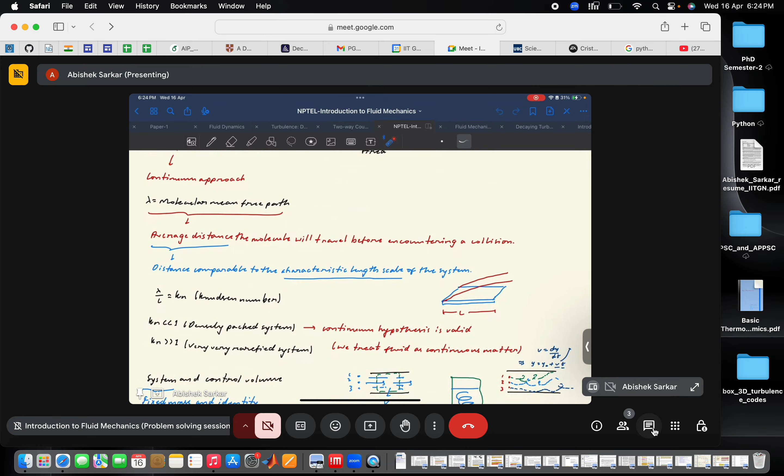But as we saw when dealing with the Navier-Stokes equation or the fluid kinematics part, these properties are operated upon by different differential operators. For these differential operators to operate upon these fluid properties, we need these functions or flow properties to remain continuous, and for that we took the aid of this continuum approach.

We stated that these flow properties, even if the fluid molecules are considered to be made up of, or if the bulk of fluid is considered as a collection of fluid molecules, then also at a certain length scale or limit we can consider the fluid properties to behave as a continuum.

For example, while measuring the density of the fluid, that is delta m by delta V, the mass as well as the volume of the fluid element is considered to be small enough. But how small? If the volume of the fluid element is very very small, we will encounter rapid fluctuations in its measurements. Also, if the elemental volume taken to measure density is considered too large, then we will not take into account the density gradients in the flow field.

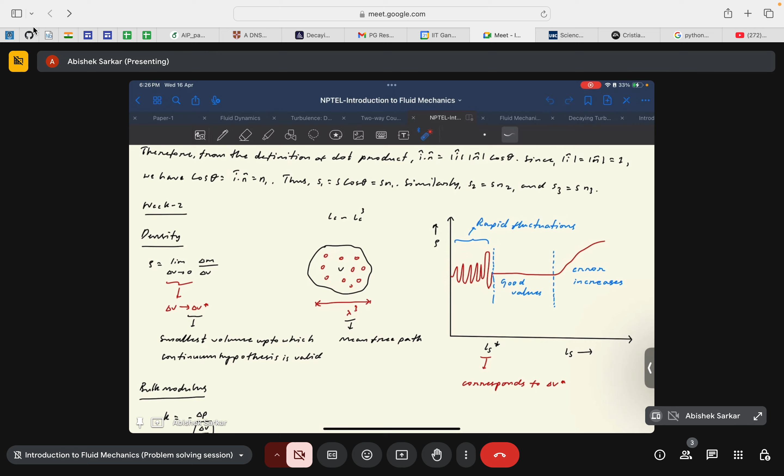Okay, so let me go back up. Sorry for scrolling to and fro.

This continuum approach that we discussed was quantified using a non-dimensional number, and by now you are quite well versed with non-dimensional numbers such as Reynolds number, and in this case, Knudsen number. There will be other non-dimensional numbers such as Stokes number or Froude number. These are the non-dimensional numbers we deal with while studying fluid mechanics, something you might have been introduced to in the last week of this course when discussing dimensional analysis.

Similar to it, Knudsen number is also one of those non-dimensional numbers used to quantify the continuum hypothesis. It is basically the ratio of the mean free path of the fluid molecule over the characteristic length scale of the flow. We discussed for ample amount of time what the characteristic length scale of the flow means.

If Knudsen number is much lesser than 1, it would mean that the fluid system is very densely packed and the continuum hypothesis is valid. But if the Knudsen number is much greater than 1, it would mean that the fluid system is very rarefied. Rarefied means the fluid molecules are much more far apart, which will result in the characteristic length scale of the flow field being of the order of the mean free path, or even greater, which will result in different kinds of errors in our measurements. That's why we tend to exclude this scenario while dealing with this basic fluid mechanics course, and we limit our study to the limit where the Knudsen number is much lesser than 1.

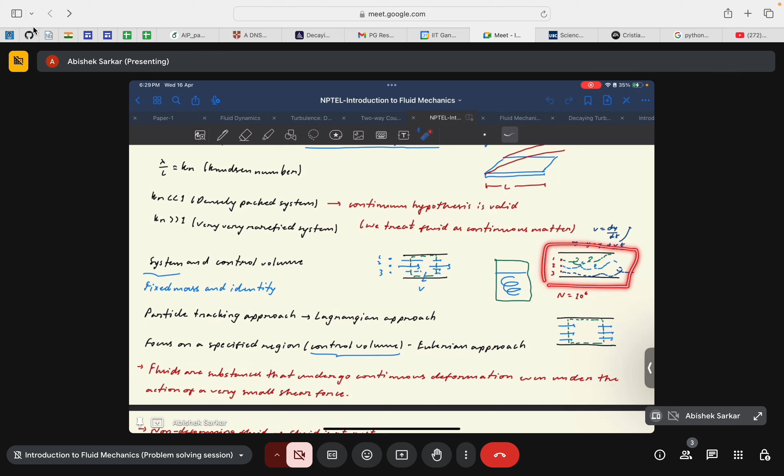But as we pointed out, say for example we are taking 3 particles here, a fluid mechanics system would comprise of n number of particles, where n will be very large, like around 1 million. So it turns out to be very impractical to check each and every particle every time to understand the behavior of this fluid mechanics system.

Rather than that, what we do is look into a particular region in the flow field known as a control volume, which we thoroughly discussed while covering the Reynolds transport theorem, using mass and momentum conservation respectively to understand the control volume approach. And we saw that this control volume approach gives us considerably accurate results with much lesser computational cost.

That's why the control volume approach was devised and is still very highly appreciated in basic fluid mechanics courses.

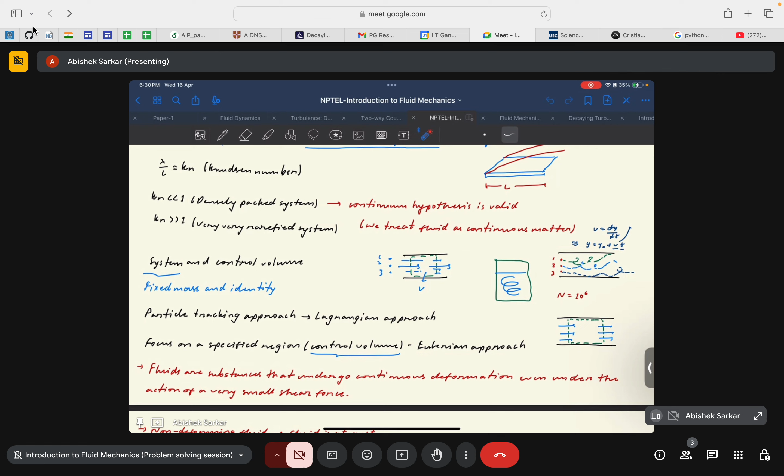Then we looked into the concept of traction vector, which was basically used to define the force acting on a particular area. You might ask, then why not define it as pressure? But pressure is not the only force that acts on a fluid mechanical system. We eventually saw that apart from pressure, there are shear stresses and normal stresses as well that act on the fluid mechanics system. So we need to take into account their contribution as well, which would lead to the deformation of the fluid element.

So in order to take into account all these kinds of forces along a particular coordinate direction, we define the concept of traction vector. This traction vector depends not only on the force and direction of the force, but also on the orientation of the area. That was one of the key features of traction vector, and we saw how it is related to the shear stress tensor.

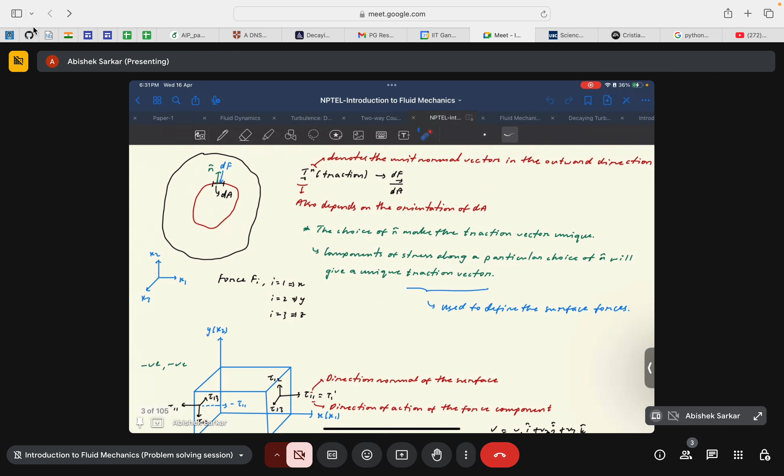By tensor we meant that it has two free indices, and we require two indices. For example, in the case of a second order tensor, we need two indices to completely define the property.

Shear stress, or stress in general, is a second order tensor where we need two independent indices, i and j, to define it completely. If i varies from 1 to 3 and j varies from 1 to 3, then tau ij is a second order tensor with 9 components. Since tau ij is symmetric, as we saw from the conservation of angular momentum, it has 6 independent components.

For example, components such as tau xy equal tau yx. Similarly, tau xz equals tau zx, and tau yz equals tau zy.

Then we used this particular approach to find the relationship between the shear stress tensor and the traction vector. We found that the traction vector can be related to the stress tensor by this relation, where repeating indices mean summation over that index, known as Einstein's index notation. So to point out the application of the traction vector in a simpler manner, let me show you a diagram.

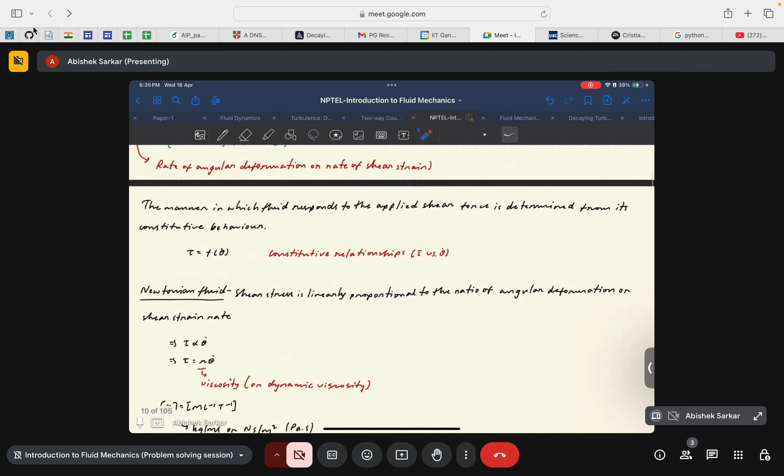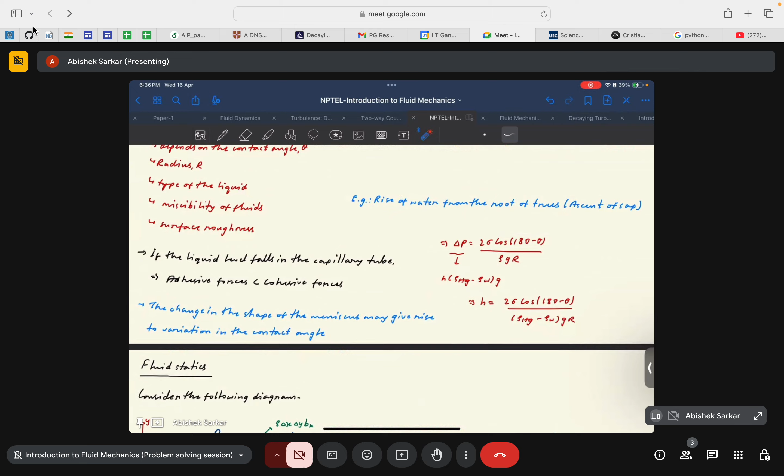Before that, I think we should discuss viscosity and surface tension as well, because I think I am skipping through this too fast. We should cover them as well.

Along with pressure, the other fluid properties are viscosity and surface tension. We found that viscosity originates from different sources in liquids and gases. In liquids, viscosity is due to intermolecular forces of attraction between fluid molecules, while in gases it is due to the molecular transfer of momentum.

In gases, if we increase the temperature, the movement of individual molecules is amplified, resulting in higher viscosity. That's why as temperature increases, the viscosity of a gas also increases. But in liquids, since intermolecular forces of attraction decrease with increasing temperature as the fluid molecules tend to move apart, the viscosity of these liquids in bulk will decrease as temperature increases.

Then we found out that these fluids can be classified into two major categories considering viscosity: Newtonian fluids and non-Newtonian fluids, where Newtonian fluids are a type of fluid where the shear stress in the fluid elements is directly proportional to the shear strain rate.

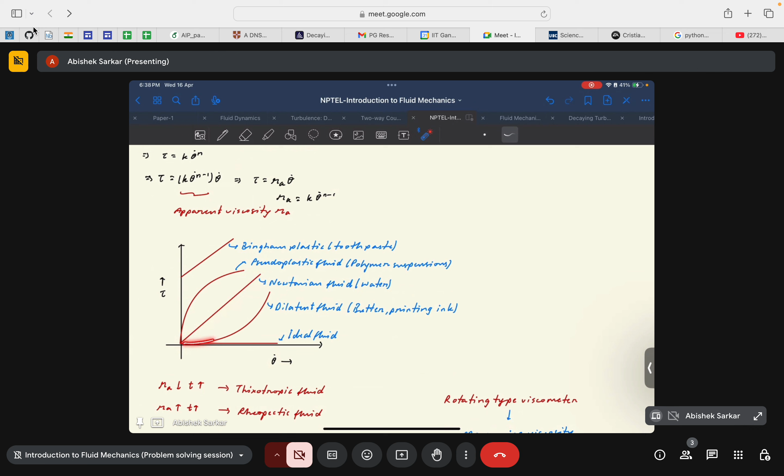So this was the graph used to describe these different kinds of fluids. For ideal fluid, since there is no viscosity, the shear stress is 0, so there is no shear strain generated, that's why the shear stress will also be 0. So Newtonian fluids, since they are directly proportional to each other, give a linear line, and other types of fluids show different kinds of behavior accordingly.

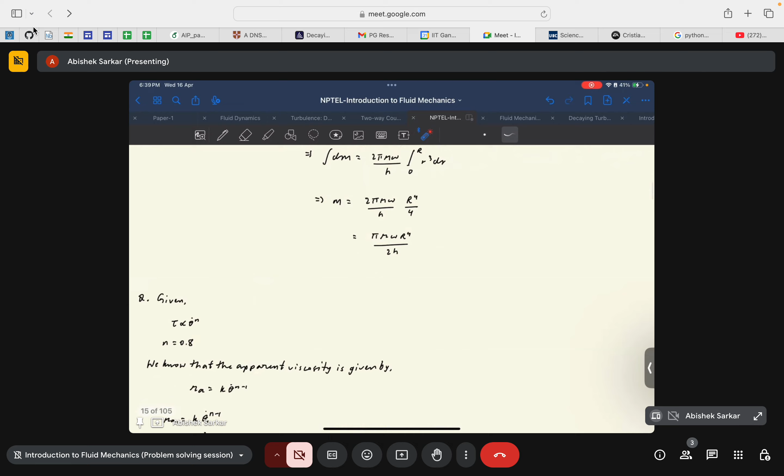Then we discussed the concept of surface tension, which is basically the additional force in the fluid molecules that they have, the additional forces that these fluid molecules have in order to retain their shape, even if there is a discrepancy of forces in the fluid molecules at the surface of the liquid.

For example, if this is the free surface and this is the liquid molecule, then because of the cohesion forces between the lower surface of this liquid molecule and the liquid in the bulk liquid, the attractive forces between these fluid molecules and the bulk liquid molecule will be higher than the attractive forces between the upper surface of the liquid molecule and the vapor above the free surface.

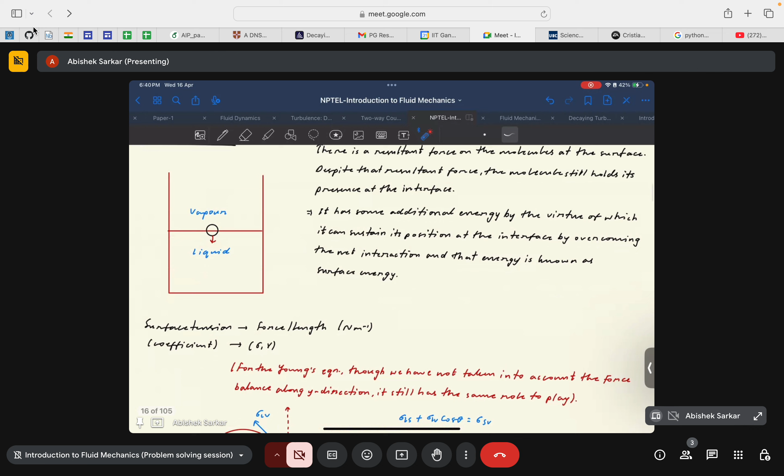But then also because of this imbalance of forces, the liquid molecule will try to get dissociated, it will try to break apart, but then also the liquid molecules tend to retain their shape, and this additional force, by the virtue of which they are able to retain their shape at the free surface, is known as surface tension. This surface tension force per unit length is defined as the surface tension coefficient, known as sigma.

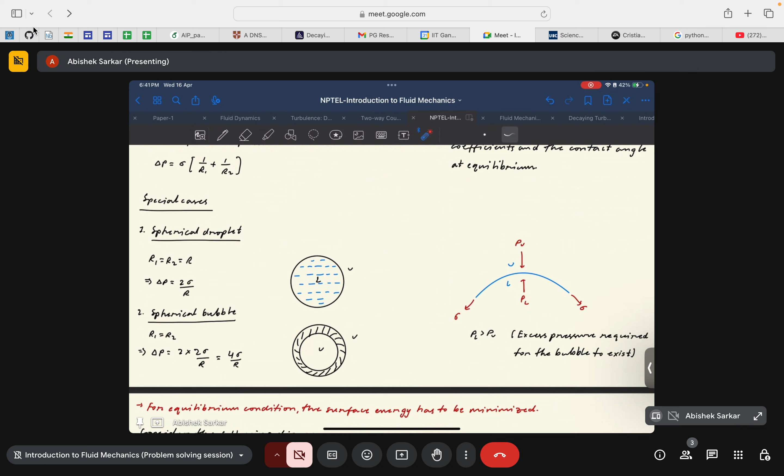So these are related, and this surface tension coefficient for different cases is given. For example, in the case of spherical droplets, the excess pressure inside the spherical droplet is given by 2 sigma by r, where r is the radius of the sphere. In the case of a spherical bubble, it will have two different liquid layers, so you need to take into account the contribution from these two layers separately, which gives delta P as 2 times 2 sigma by r, that is 4 sigma by r.

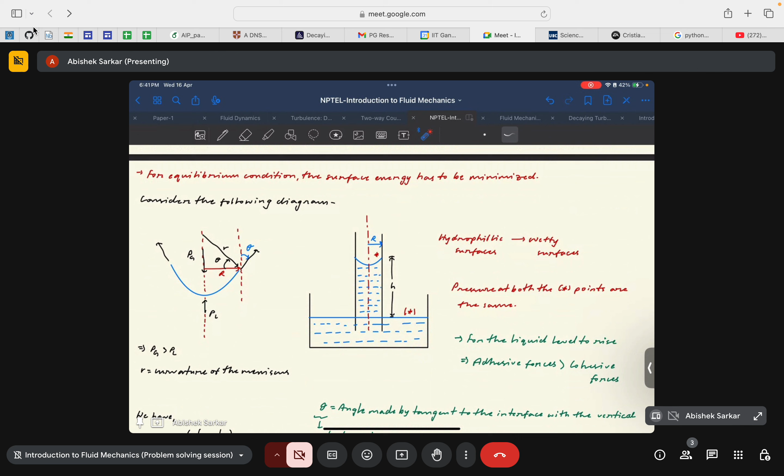Then there was the concept of capillary rise, which is basically the balance of the surface tension forces that tend to hold this liquid column, and the weight of this liquid column then tends to pull this liquid column down. Capillary rise usually occurs when a very thin capillary tube is placed inside a liquid container, and because of the adhesive forces between the surface of this tube and the liquid molecules, the liquid tends to get pulled up.

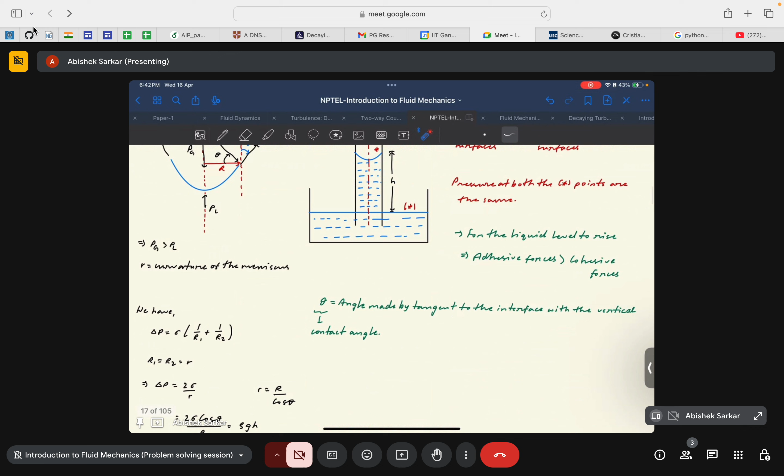We do a balance between the surface tension forces and the weight of this liquid column to find the expression for capillary rise, and we found that for an acute angle of contact we get delta P as 2 sigma cos theta by r, or the capillary rise as 2 sigma cos theta by rho g r.

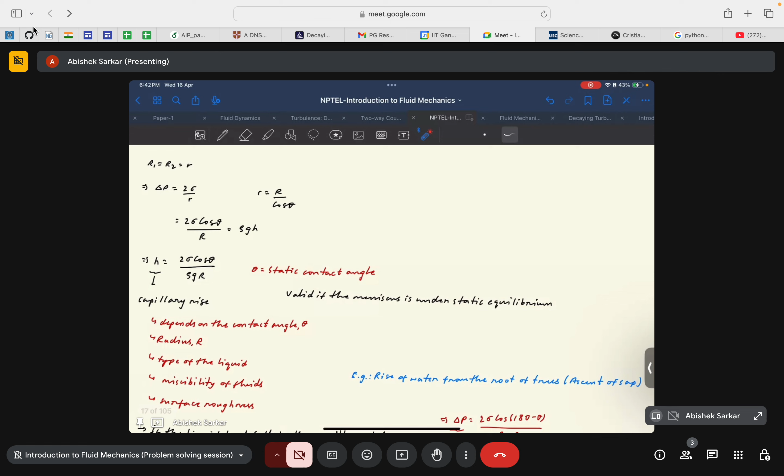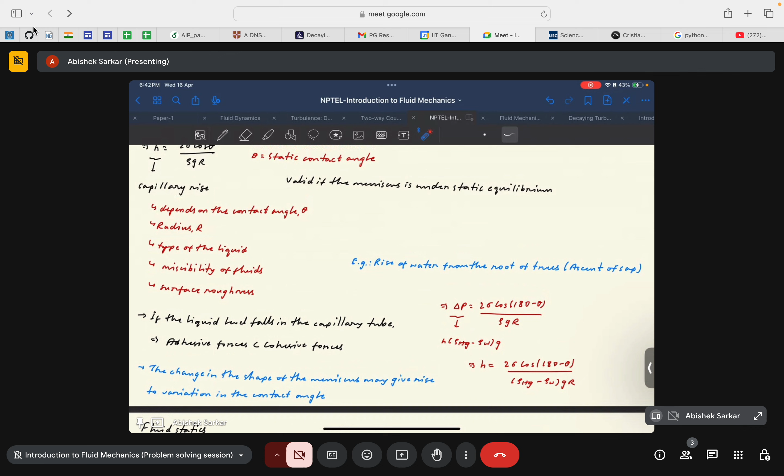Similarly, we found that in the case where the static contact angle is greater than 90 degrees, the obtuse angle, then delta P is given by 2 sigma cos(180 minus theta) by rho g r. This is usually found in fluids such as mercury, so rather than the liquid level going up in the capillary tube, the liquid level tends to go down, it tends to dip.

The meniscus, that is the shape of the free surface formed in the capillary tube, in the case of an acute angle, is a concave surface, but in the case of obtuse contact angles, for example in the case of mercury, they tend to form a convex meniscus.

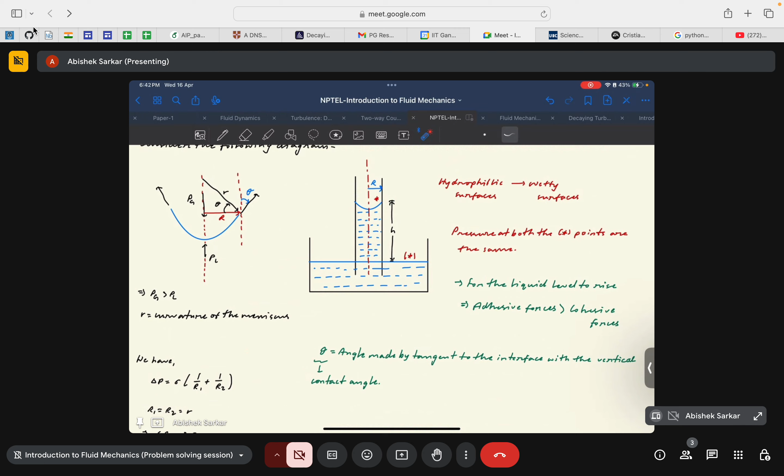Then we discussed the fluid statics part, where we see the variation of pressure. So let me reiterate: the entire subject of fluid mechanics can be divided into three fundamental parts: fluids, fluid statics, which we'll discuss first in today's discussion, and then after that we will look upon fluid kinematics.

And then fluid dynamics. Okay, so because of this constraint of time, I don't think I will be able to reach up to fluid dynamics, but since we already discussed this in the last few weeks, it should be quite fresh to you. The basic thing is that fluid statics, as the name suggests, refers to the concepts of fluid mechanics where the fluid is at stationary state, and we look upon the entire dynamics of the fluid flow, where we consider the forces as well as the motion generated.

We look upon the forces that act on the fluid when it is at stationary state. In the case of fluid kinematics, as the name suggests, the fluid is in motion, but rather than looking upon the forces that generate the flow, we are more interested in visualizing how the flow behaves given that the flow is in motion. So we do not look upon the origin of the forces that drive the flow. But the theory would seem incomplete if we do not look upon the forces that generate the motion of the fluid. That's why in fluid dynamics we look upon the complete analysis of fluids in motion, where we consider both the motion and the forces that generate it.

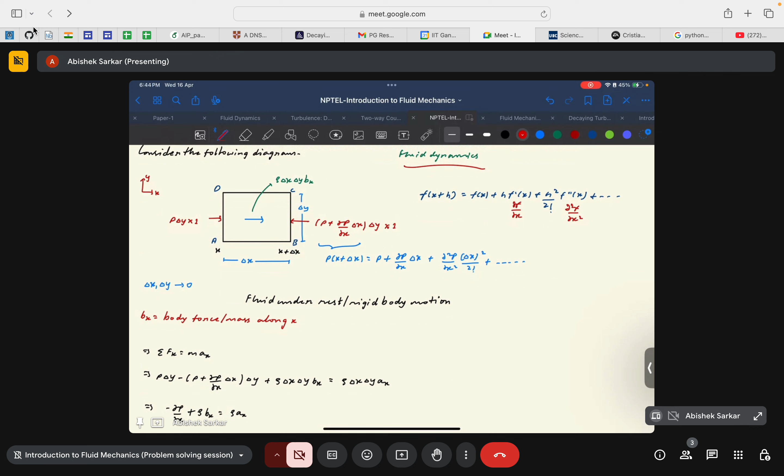We start with the basic governing equation given by Euler's equation of motion, again, because since the fluid is at static state, even if the fluid is very highly viscous, it won't generate any kind of shear forces because the velocities become zero. As you saw, these shear stresses are basically a function of the velocity gradient. So if the velocity itself is zero, there is no velocity gradient. That's why there is no need of considering these viscous forces.

So the basic governing equation of motion in the case of fluid statics can be derived from this Euler's equation of motion, given by this equation. Once you do that, finding out the governing equation of fluid motion along the x, y, and z directions, we find that along the z direction the pressure gradient is balanced by the body force due to gravity, and we found that this relation, dp by dz equals minus rho g, turns out to be one of the very important relations.

This is an important relation in fluid statics, which becomes the base of different kinds of flow measuring devices, such as pressure measuring devices like the manometer. In fact, we use the same concept in the venturimeter as well, where we use similar manometers or piezometers to measure the pressure gradients. So this dP by dz equals minus rho g is known as the hydrostatic law, and is indeed one of the very important equations in fluid statics and in fluid mechanics in general.

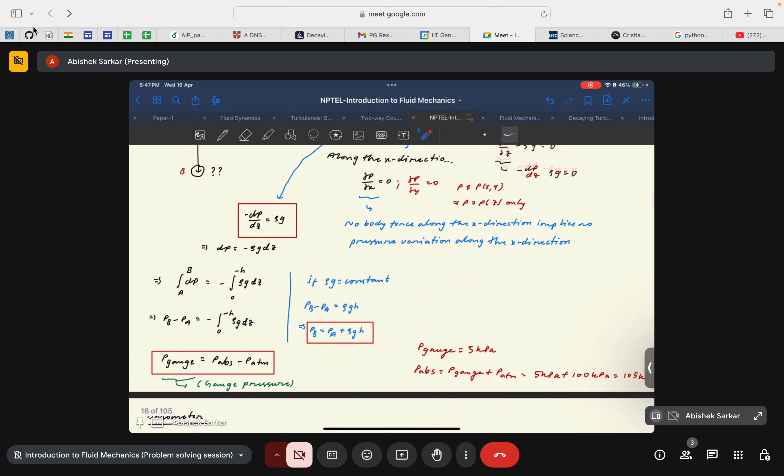Given this equation, we find that pressure is not constant throughout the depth of the fluid, but is rather a function of the depth, where pressure increases as the depth of the fluid increases. For example, if we're measuring pressure at point A and at point B, then pressure at point B would be higher because pressure is a function of depth. We will see what implication this has while we measure the forces on submerged bodies.

So then we look upon the principle of manometry. This again is one of the very important concepts, and we can expect questions in the exams on manometers. Let me just go through this example once again. It's basically a flow occurring from A to B, and here we can try to correlate all the concepts that we have discussed till now. If you would have attended the lecture by Professor Chakraborty or the problem solving sessions, you would understand that, for example, in the case of flow through this pipe or duct, whatever it may be, let us consider it's a flow through a pipe.

For a flow to occur, we need a negative pressure gradient, right? That we found out as one of the fundamental conclusions from the exact solutions of Navier-Stokes equation. We found out that dP by dx, or any axial direction, no problem. But for example, if I consider the coordinate systems as x and y, then this dP by dx has to be negative for the flow to occur in the positive x direction.

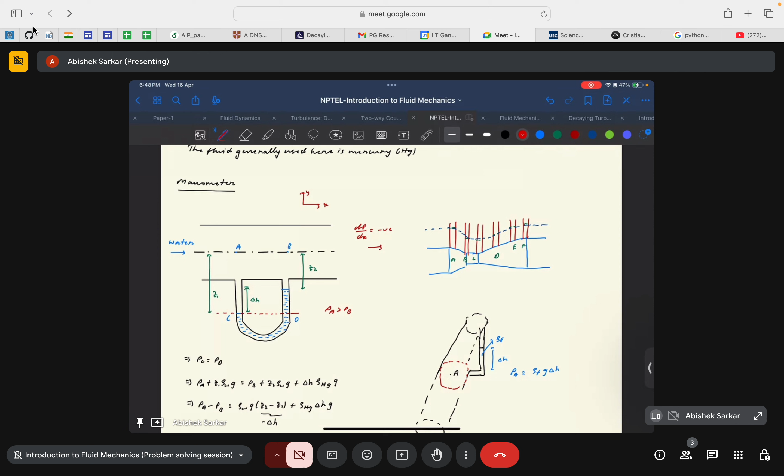By now you would have understood that since the flow is occurring as shown by this arrow, for the flow to occur from A to B, pressure at point B has to be lower than pressure at point A. So since the pressure at point B is lesser than pressure at point A, it will displace a lower volume of liquid in the manometers compared to point A. So just by looking into this diagram, you should understand that the pressure at point B is lesser than pressure at point A.

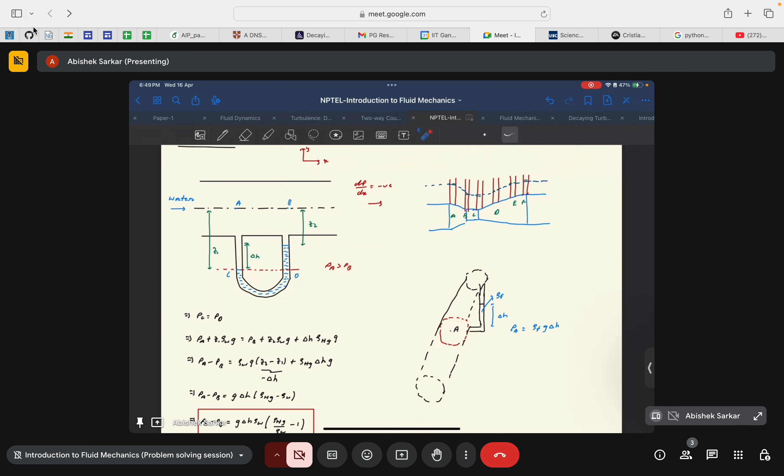Now secondly, in order to find a relationship between the pressure difference between point A and point B, we use the principle of manometry. So in order to do that, we consider a datum which would ideally be the lower level of the liquid column in the manometer. For example, it is at point C, the liquid level is at lower position. So when we consider the datum to be at point C, then the different heights or distances of these different points need to be found out.

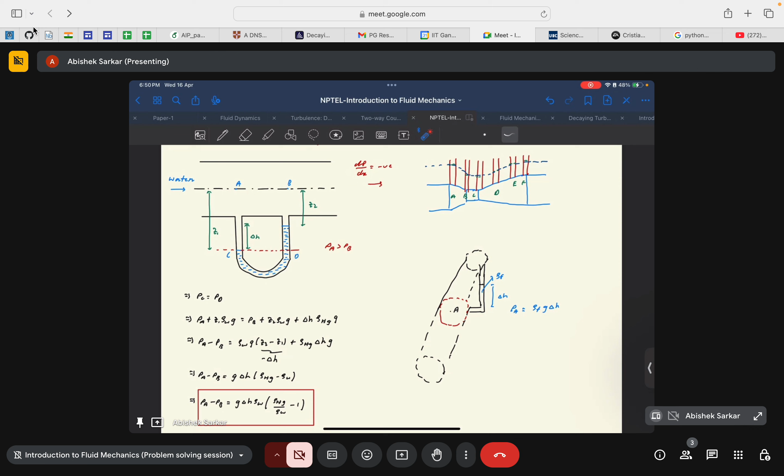So what we do is, we know that from hydrostatic law, pressure at the same depth would be equal. Since point C and point D are at the same depth, pressure at point C and point D has to be equal. So we equate the pressure at point C and point D, and any discrepancy in pressure is taken into account because of this difference of fluids. We'll see how. PC is equal to PD. PC, pressure at C, would basically be pressure at A plus the pressure because of this particular liquid column. That is, if the density of the fluid, water in this case, is rho W, then the pressure because of this length of liquid column would be rho W G Z1. So that's what we have written here.

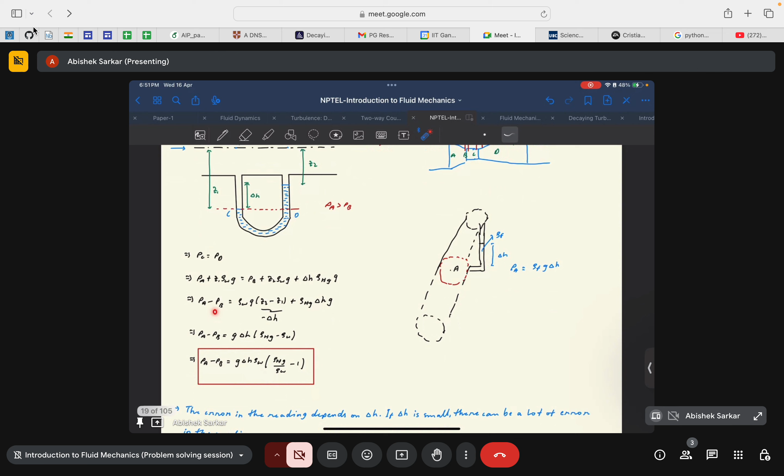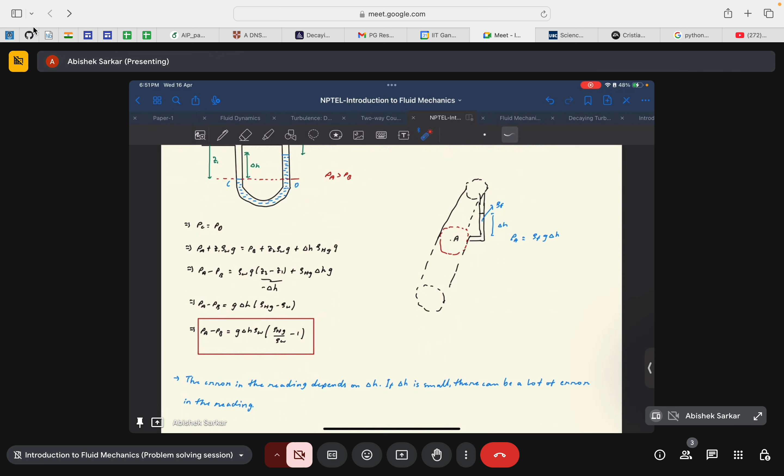And then pressure at point D would be PB plus rho W G Z2 plus rho Hg, that is the manometric fluid used in this particular case, into delta H times G. So that's exactly what we have done here. Then just take B to the left hand side and this term to the right hand side. From that, after doing some calculation, we find out that PA minus PB is equal to G times delta H times rho Hg minus rho W. So this is very simple. Any kind of manometer question that you can get in the exam should not be that difficult, and moreover much more difficult questions will not be asked. So it will be very simple, but you need to know the very fundamental principle upon which these formulas are derived.

Then we look upon the forces on plane surfaces. That is, if we submerge a particular surface in a liquid vessel, what are the forces that act on those particular objects? These kind of scenarios become quite relevant when we are designing dams or structures that are made on water bodies.

In order to do that, we take the help of this equation given by yp is equal to yc plus ic by a yc, where yc is the center of gravity, the location of the center of gravity from the free surface, as I can show here. So h bar basically would be yc, the distance of the center of gravity of this particular shape from the free surface, and yp is the center of pressure, or distance of center of pressure from the free surface.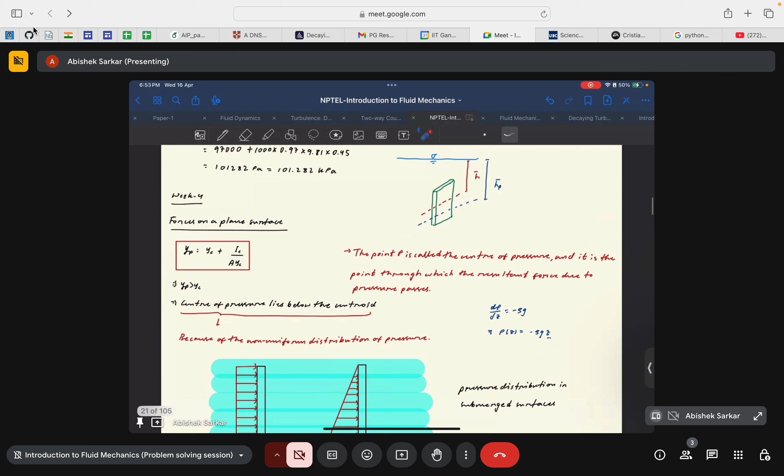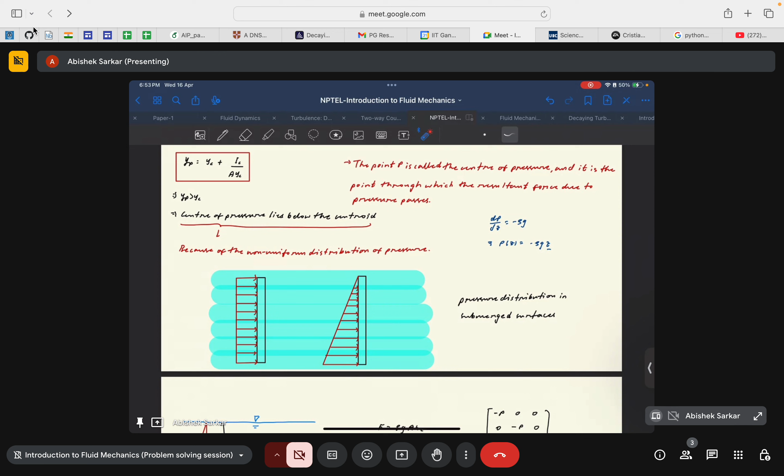This discrepancy between the center of pressure and the center of gravity primarily arises because the pressure distribution is not uniform in the case of hydrostatic condition. This pressure increases with depth, as shown in this pressure distribution. So if you are going to find the center of gravity because of this pressure distribution, you find, I will not say center of gravity, but the center of balance, or I don't know what term to use.

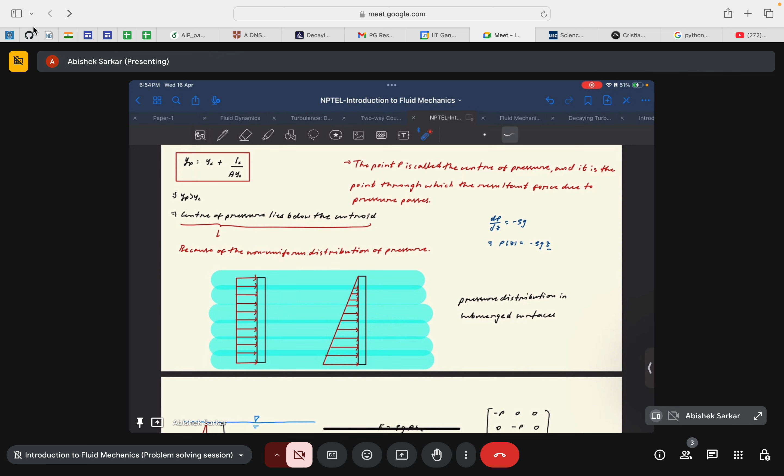For example, if you are trying to find out what should be the center of gravity because of this type of loading, you will find out that it will not be at the center, but rather it will tend to be tilted towards the lower half, just to take into account the higher pressure forces at the lower end of the surface of this particular shape. That's why this center of pressure is always at a greater depth than the center of gravity of the body in the case of fluid statics.

Then we solve different examples, and just for the sake of your exams, what you can do is look into these examples that I have taken in class, also examples by other TAs as well. So it is a good exercise.

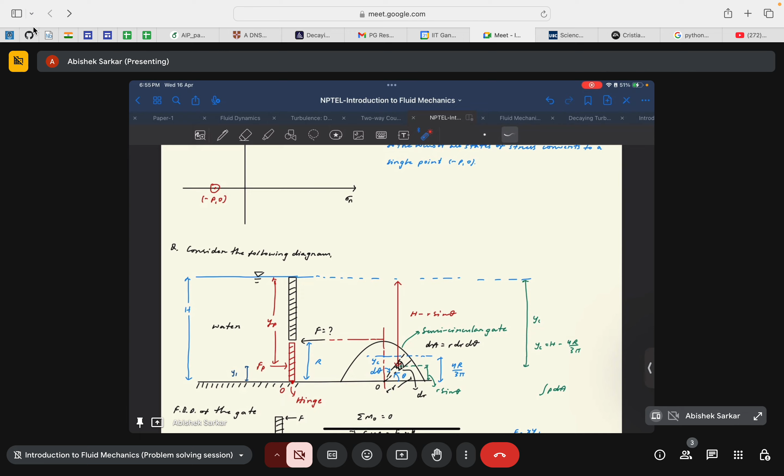The crucial thing to remember is that in these kinds of questions, remembering the formula for the moment of inertia is quite helpful, as well as the center of gravity, because it will not always be the case that you get the shape to be a simple rectangle or square. Rather you can get something like a semicircle or a triangle as well. So you need to remember the formula for the area moment of inertia and the center of gravity of that particular shape. That might come quite handy.

Then there was the concept of stability of submerged bodies and floating bodies. We found out that in the case of submerged bodies, the stability criteria was determined by the position of the center of buoyancy and the center of gravity. If the center of buoyancy was above the center of gravity, then the body was at stable equilibrium. By stable equilibrium, I mean that if you give a certain tilt or displacement to this particular body, because of the location of the center of buoyancy and the center of gravity, it will tend to generate a restoring moment that will revert the orientation of the body to its initial position.

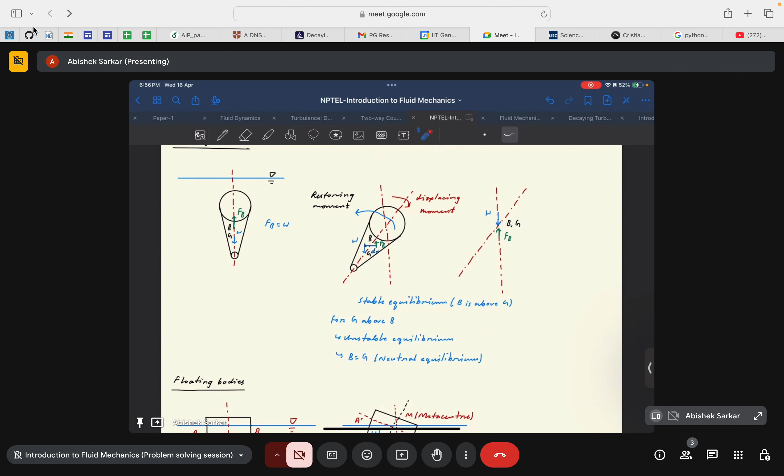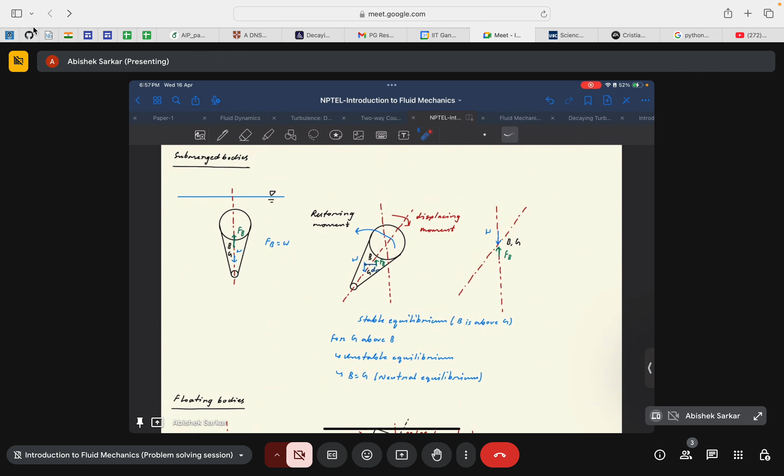In the case of unstable equilibrium, if you give a certain displacing moment, then because of the location of the center of gravity and the center of buoyancy, it will tend to displace the body even further, resulting in an unstable scenario. So for fully submerged bodies, if the center of gravity is above the center of buoyancy, the body is at unstable equilibrium, and if B and G coincide, then it is at neutral equilibrium. Whatever displacement you give, the body will tend to remain at that particular alignment.

But in the case of floating bodies, which is a topic of more interest from the perspective of fluid mechanics, the stability of these floating bodies is determined by the location of the center of gravity and the metacenter. We found out that the location of the center of buoyancy is not fixed in the case of floating bodies, because the area of the body that is under the fluid changes when the orientation of the body changes.

Since the area or orientation of the submerged part of the body changes, the location of the center of buoyancy also changes. The line drawn from the center of buoyancy to the axis of the body, where these two lines meet, is known as the metacenter.

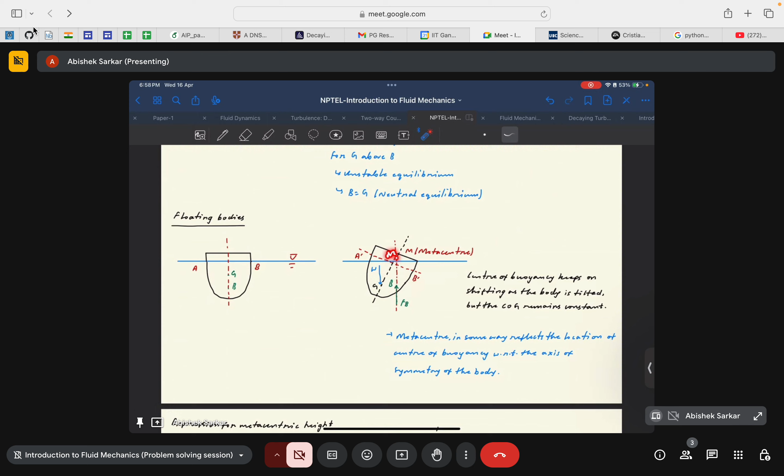We found that the stability criteria is: if the metacenter is above the center of gravity of the body, we get stable equilibrium. If the metacenter is lower than the center of gravity, the body is unstable. If the metacenter coincides with G, it is a neutral equilibrium.

There was one more interesting scenario discussed by Professor Chakraborty. He pointed out that if M above G is the stability criteria, then it's intuitive that if we make the body wider, pushing toward a wider shaped body, the metacenter would be at a higher location, creating a more stable scenario.

But he also pointed out that if the metacentric distance, from the center of gravity to the metacenter, is very large, it creates different issues. He took the example of a ship: if the metacentric height is too much, any displacement of the ship creates discomfort for passengers. So it's usually a compromise between passenger comfort and vessel stability that determines the metacentric height.

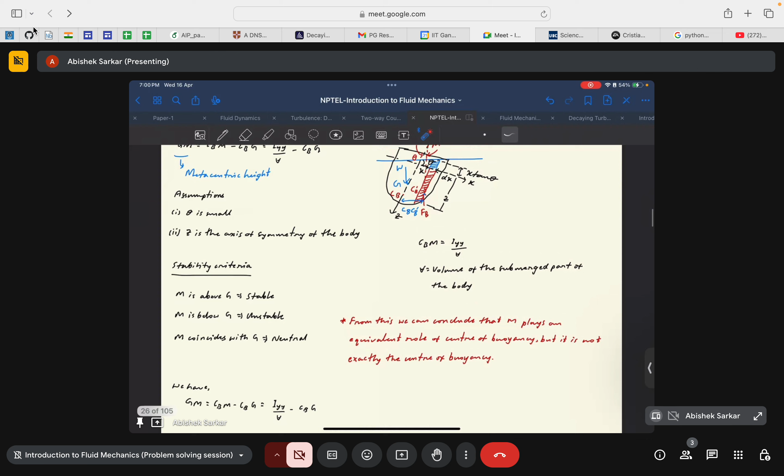Then we look into the formula for finding the metacentric height, where IYY denotes the moment of inertia of this particular shape, and V denotes the volume of the submerged part of the body.

Then we look into the concept of fluid under rigid body motion, where the governing equation for this scenario was found from the fact that the change in pressure at the free surface is equal to zero.

Then, using the concepts of complete differential and Euler's equation of motion, we found that the slope of this free surface can be found to be tan theta equals ax by g. This is the slope of the free surface.

Going back here, if the height of the slanted surface becomes higher than the height of the vessel, the liquid will tend to spill out of the container. This height of the slanted surface in the liquid container was determined by the acceleration of the vessel.

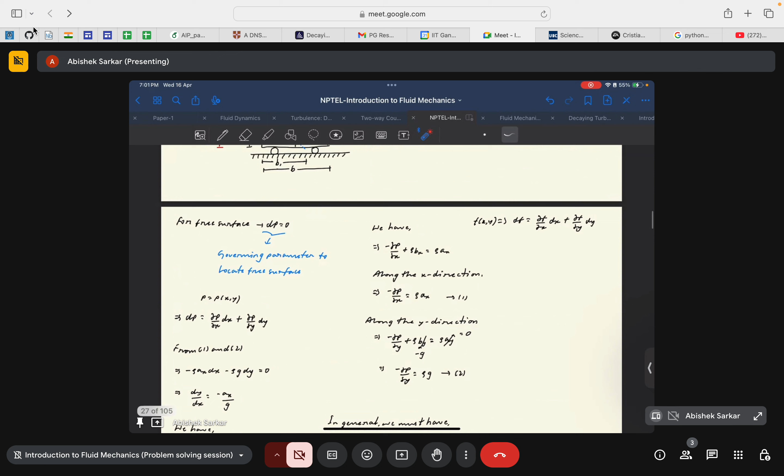So there might be questions asking what is the value of this acceleration that the body can reach before the liquid starts to spill out from the container.

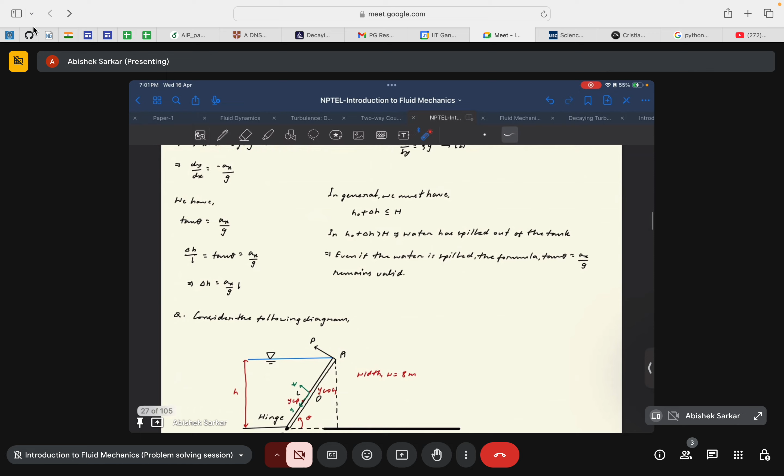Then we start our discussion with fluid kinematics, and we again reiterate the Eulerian and Lagrangian approach. In that, we discussed different kinds of flows.

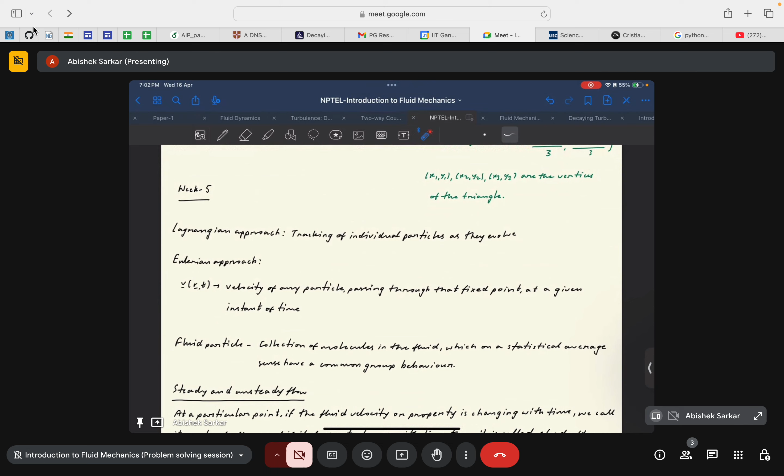That was steady flow and unsteady flow, then uniform and non-uniform flow, and scenarios where the flow can be steady and non-uniform, and where flow can be uniform and unsteady. There was a very good example taken by Professor Chakraborty, so I will skip that.

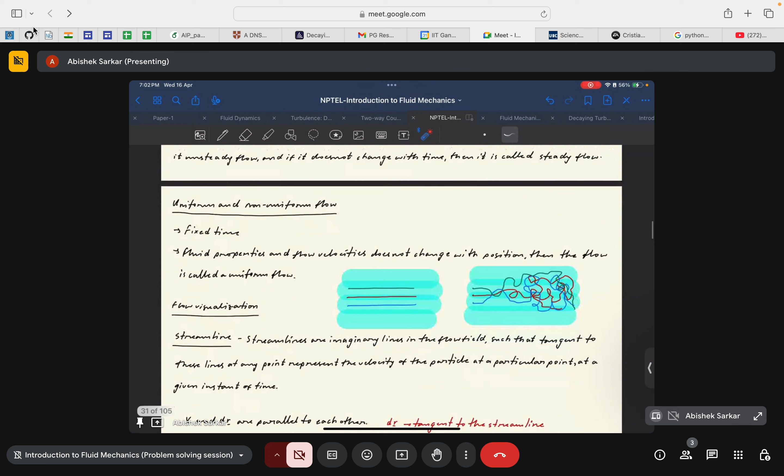Then we come into the main portion of fluid kinematics, flow visualization. We found that for fluid visualization there are mainly three characteristics that we use to visualize flows, popularly known as different lines, since these visualizations are usually obtained in the form of curves. These characteristics are known as streamlines, streak lines, and path lines.

So let me again, for your recapitulation, go through the formal definitions of streamlines, streak lines, and path lines.

For streamlines, the important thing is that streamlines can never be visualized in real life flows. Streamlines are always imaginary. They are imaginary lines in the flow field such that the tangent to these lines at any point represents the velocity of the fluid particle at a particular instant of time.

And the equation of streamline is found to be given by this relation.

Then streak line is the locus of the fluid particles which at some prior instant of time have passed through a common point. In general, when we try to visualize the flow using tracer particles or fluid dyes, it is the streak lines that we are usually visualizing, not even the path lines, but the streak lines.

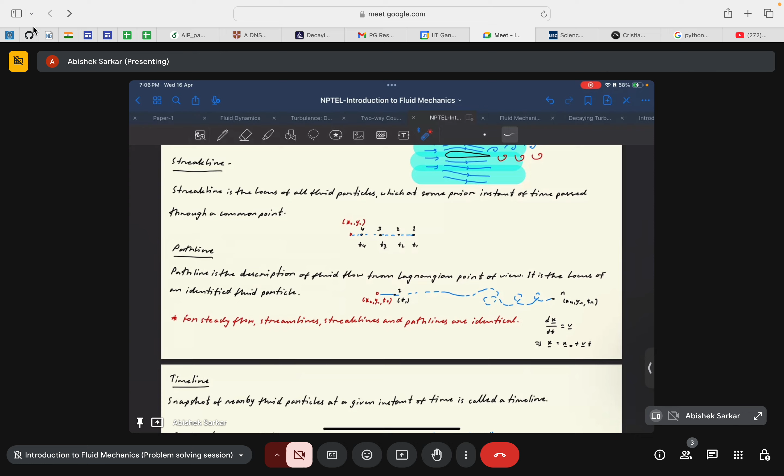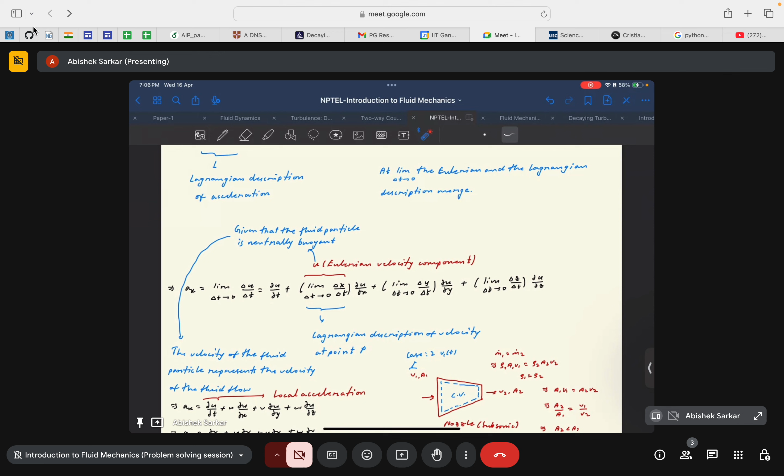Then after that we look into the functional form of acceleration in the case of the Eulerian approach. We found that in the Eulerian approach, the acceleration of the fluid molecules will not only be a function of time but a function of space as well.

So we discussed thoroughly how the variation of the property through space can generate acceleration. We took a good example, the case of flow through a nozzle, where the flow at the inlet and the outlet is essentially steady flow, but because of the convergence of this particular nozzle, the flow is getting accelerated.

Even if the incoming flow is not varying with time, because of the change in area and mass conservation, this flow is getting accelerated, and this is the type of acceleration taken into account by the advective or convective acceleration terms.

Then we look into the different forms of fluid deformation, that is linear deformation and angular deformation. I'll try to move a bit faster. While discussing fluid deformation, we were able to find the form of mass conservation given by this equation: d rho by dt plus nabla dot (rho v) equals 0, and in Cartesian coordinates this is given by this equation. This equation is also popularly known as the continuity equation.

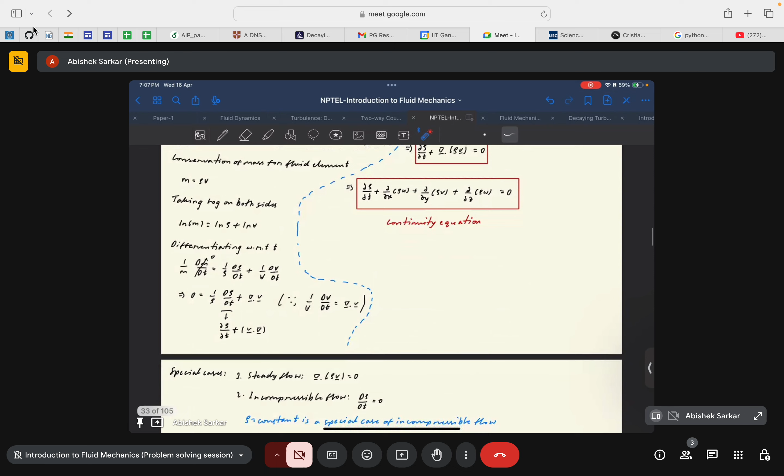Then I will try to skip a bit for faster. Yeah, we looked into some examples.

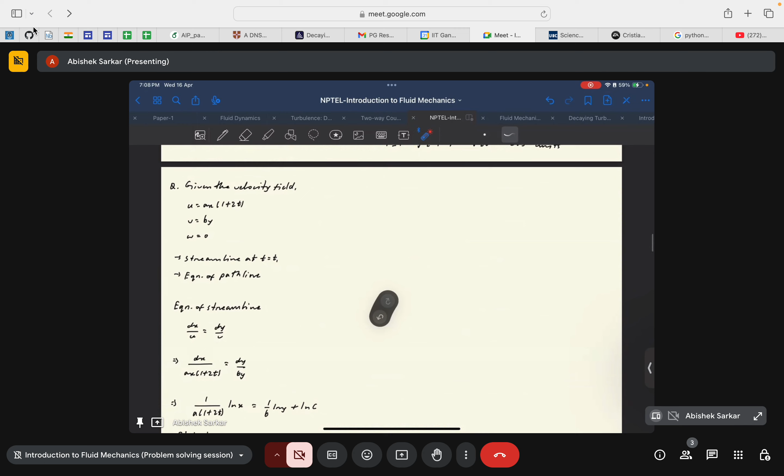We solved the mass conservation equation to find out, given your velocity field, you can use the mass conservation equation to find the other velocity component. Because of the relationship between these two, if the v component is given, then dou u by dou x plus dou v by dou y equals 0, and you can find the respective u component.

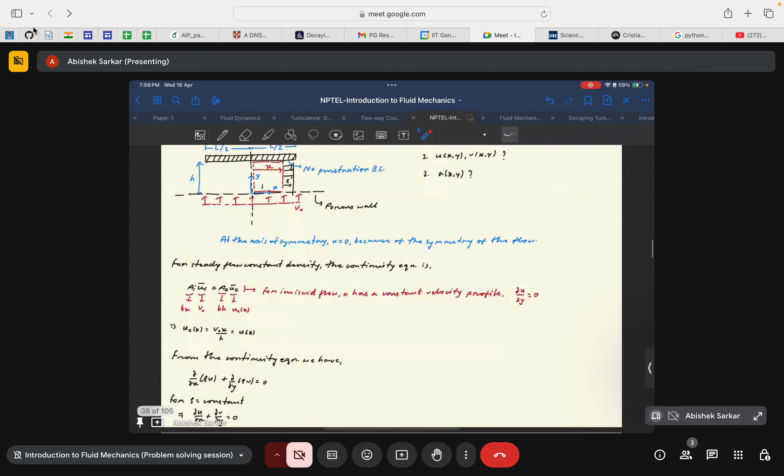Then we took ample amount of time to solve different kinds of problems for this mass conservation equation. Then we looked into the angular deformation of a fluid element, which basically generates these shear stresses.

So we looked into the functional form of the strain rate tensor in the Cartesian coordinate system. For example, epsilon dot xy will be given by dou u by dou y plus dou v by dou x, and similarly the other components can be found out.

And in general, in tensor notation or index notation, this strain rate tensor is given by epsilon ij equals dou ui by dou xj plus dou uj by dou xi. This was the form of the strain rate tensor.

Then Newton's law of viscosity can be written in index notation as tau ij, the shear stress, equals 2 mu epsilon ij, where epsilon ij is half of dou ui by dou xj plus dou uj by dou xi. Similarly, we can also find the angular velocity in index notation, given by half of dou ui by dou xj minus dou uj by dou xi.

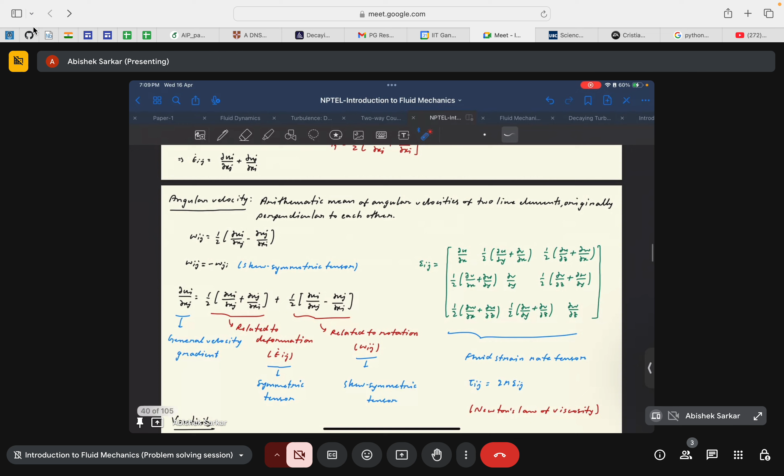Similar to this strain rate tensor, angular velocity will also generate a second order tensor, which will have 9 respective components.

And then this was one of the important concepts: the stream function. So till now we found out that when dealing with 2D flows, we'll have to deal with two different variables, u and v, to get an understanding of the flow field.

But scientists found out that in the case of 2D incompressible flows, rather than dealing with two separate variables such as u and v, we can define another variable, for example psi(x,y), which relates both u and v by the relation: u is dou psi by dou y and v is minus dou psi by dou x, and this substitution inherently satisfies the continuity equation.

If you are able to find the functional form of psi with the respective choice of boundary conditions, then rather than dealing with u and v separately, you can just find the functional form of psi and then easily find out the values of u and v.

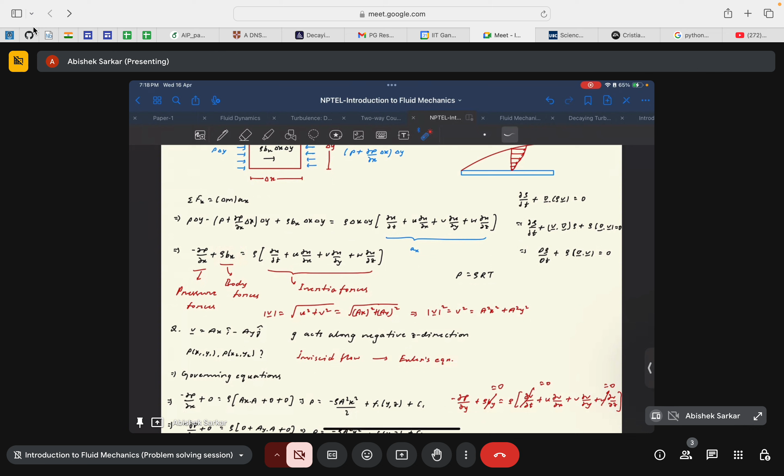Since there can be motion in the x, y, and z directions, this tends to create pressure gradients in the other coordinate directions as well. Since the fluid is in motion, even if the body force is absent in the x and y coordinates, for example, pressure gradients may arise because of the fluid motion.

We saw that the forces acting on this fluid mechanical system can be dissociated into body forces and surface forces, where the surface forces comprise the shear stresses and the pressure forces.

Considering particular types of flows, we arrived at the Bernoulli's equation. Given that the flow is inviscid, density is constant, and the flow is steady, we found that this equation, P plus half rho v squared plus rho gz, can be applied to any two points along the same streamline to find the variation of pressure, velocity, and potential energy.

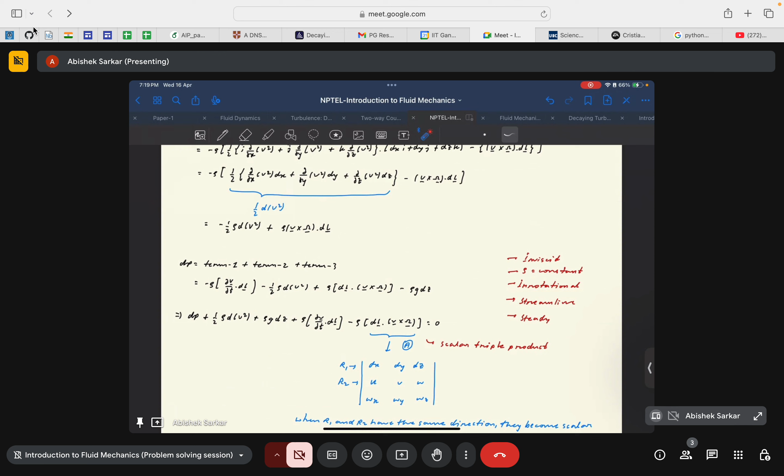But if the flow is irrotational as well, then this Bernoulli equation can be applied at any two points in the flow field. The restriction of these two points being on a streamline is removed when the flow is irrotational.

It is very nicely written here, you can take a screenshot or just look into it. So for this Bernoulli's equation, the primary assumptions are that the flow is inviscid, the flow is steady, and the density is constant - that is the special case of incompressible flow.

There was a thorough discussion of what this is about, and this equation is valid for any two points along a streamline. But if the flow is irrotational as well, along with these three assumptions, then this equation can be applied for any two points in the flow field - that is the constraint required for the validity of Bernoulli's equation.

So in an exam or any question where you feel you can apply Bernoulli's equation to find the variation of pressure or velocity, I would suggest that even if it seems obvious, write all these assumptions thoroughly. Or if the exam is objective type, check whether these assumptions are satisfied or not, and only if they are satisfied, go on to apply Bernoulli's equation.

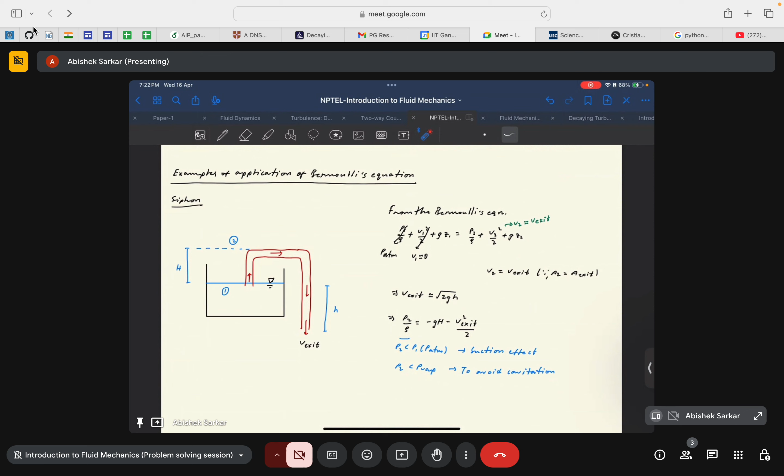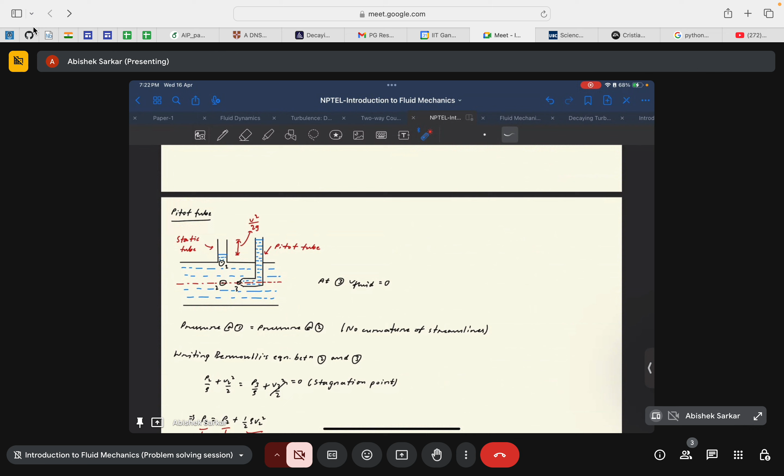The other application was the pitot tube, where we found that it can be used to find the velocity of the fluid at a particular point in the flow field. We apply Bernoulli's equation to find the velocity at point 1, which can easily be found by knowing the pressure at the pitot tube and at the static tube. From this relation, you can easily find the value of velocity at that point, which is the velocity of the flow in that particular tube.

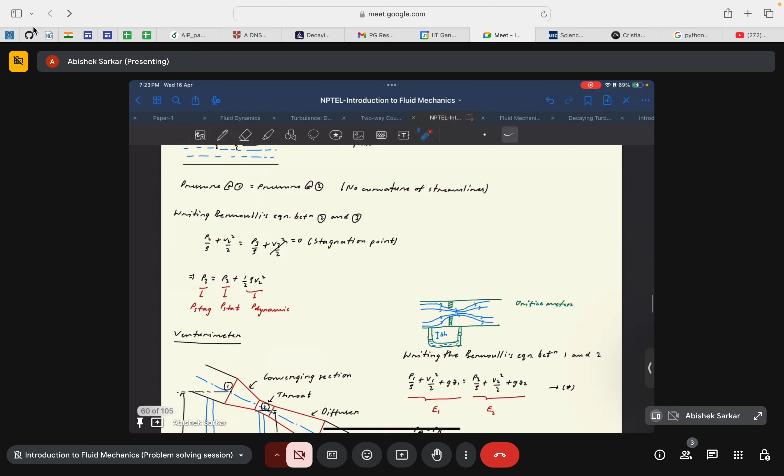This pitot tube is specifically designed and used to find the velocity of the flow. The other device that I'm going to discuss is the venturimeter.

Even if the governing equations of the venturimeter seem similar, and in one way or another you can maybe devise an expression for velocity, in reality this venturimeter is not used to measure velocity, but rather is used to find the volume flow rate through that particular pipe or duct.

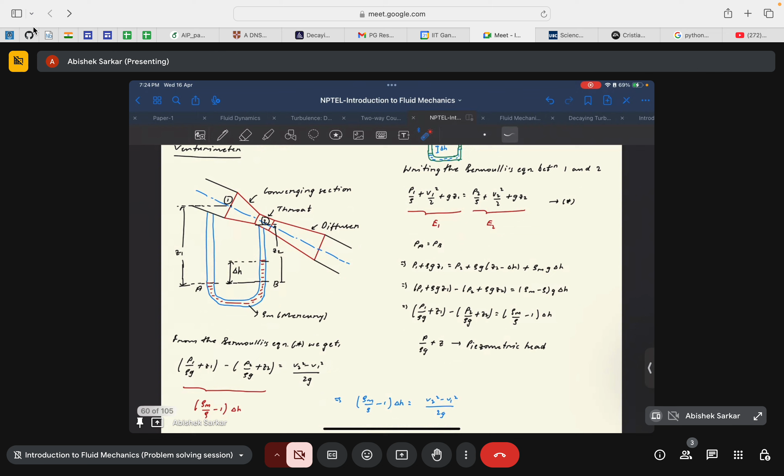So again they use this same Bernoulli's equation at two points in the venturimeter, then they try to find the relationship between these pressure heads using the pressure measured at this particular manometer. Once they do it, they are able to substitute it back in Bernoulli's equation and find an expression for Q.

You can easily find out the value of Q using this expression, because all these parameters - rho m, the density of the fluid in the manometer, and the density of the fluid you are using in the pipe, whether water or air - are already known. You also know the deflection of the manometer, the area of the pipe, and the area at the throat. Since all of these are known, you can easily use this to find the value of the volume flow rate.

And then there was the use of a coefficient of discharge, to make this measurement of volume flow rate much more accurate compared to the actual values. So we use a correction coefficient known as the coefficient of discharge to correct the measurement of this volume flow rate from the venturimeter.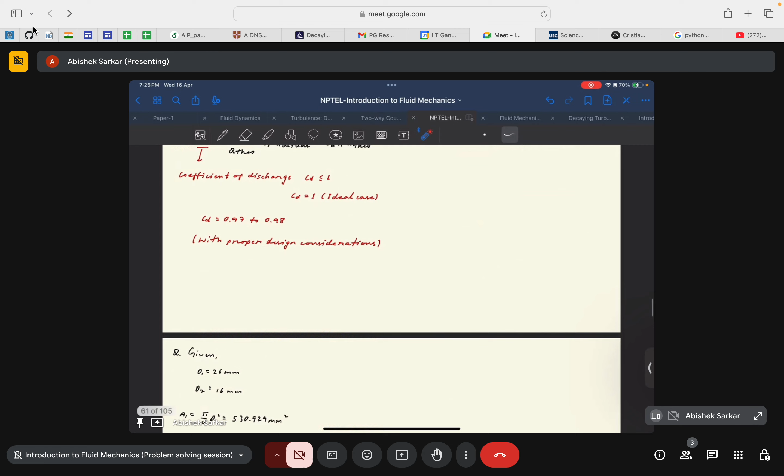Similar analogy and calculations are also used for calculating the volume flow rate through an orifice meter, but the difference is that rather than having separate converging and diverging sections, they have a uniform pipe. Rather than having a throat, they generate a similar increase in velocity and decrease in pressure, at this point and this point, by using an orifice. So they will have a pipe here, generate an orifice at that section, and use the similar governing equations to find the volume flow rate.

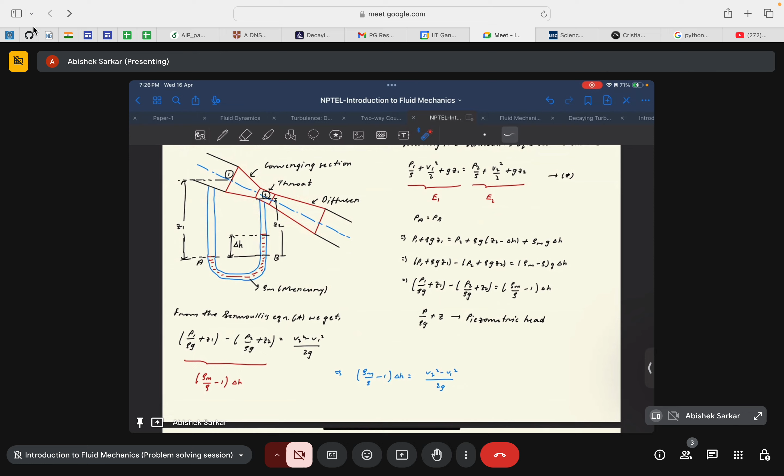The key difference is that the manufacturing cost for the orifice is much lesser than the manufacturing cost of the venturimeter, but the advantage of the venturimeter is that it gives more accurate results compared to the orifice meter. But if accuracy is not that important, and you're only interested in the bulk behavior of the fluid or the pressure difference, then you can easily use an orifice meter in your devices rather than a venturimeter, to cut out the additional costs.

I think that's all. Lastly, I'd like to conclude with the RTT, the Reynolds Transport Theorem, which is the origin of the fluid dynamics part.

We use a mathematical transformation given by this relation: dN by dt is equal to d by dt of N of system, where N is the particular property whose change we are trying to measure, related to the control volume approach by this relation: d by dt of the volume integral of rho n dV, where small n is the respective intensive property of that particular property capital N, that is n equals N by m.

So the volume integral of rho n dV plus the surface integral of rho n times vr dot n-cap dA - I will reiterate all the terms here. This relation is just used to correlate the control system approach and the control volume approach. It's basically a mathematical transformation, where capital N would mean the change of property of the system that we are trying to measure. For example, if you are trying to measure change of mass, then N would be equal to m, and small n is capital N by m.

So if capital N is m, then small n would be m by m, that is equal to 1. For example, if N is equal to momentum, then small n would be mv by m, so it will be velocity. Just substitute that here, and this is valid for vector as well as scalar properties.

This Vr here is the relative velocity of the fluid with respect to the control volume. It is very important to know this is the relative velocity of fluid with respect to the control volume, and n cap is the normal vector to the cross sectional area across which you are measuring this particular integral.

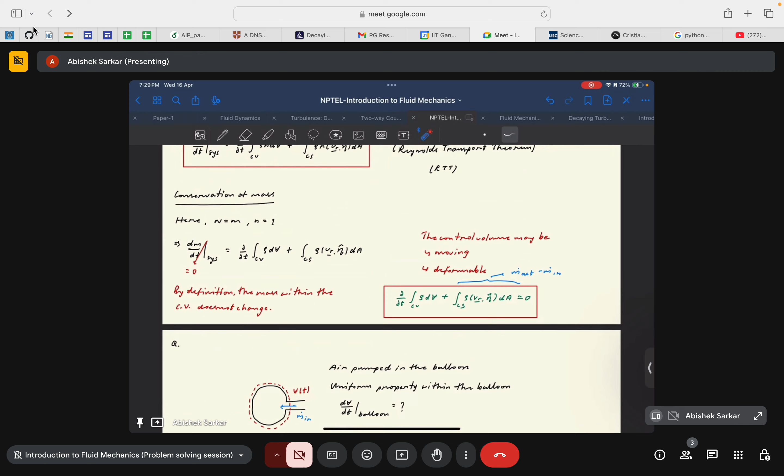I think time is up, so I will limit my discussion to here. The topics after this are quite fresh in your head, so I think that will not cause any difficulty. But I hope this recapitulation session helped you recapitulate all the concepts you need to study for your exams. So again, all the best for your exams.

Just one word of advice: look into the assignment problems. You have all the video recordings with you, so you can look into the assignment problems and the respective solutions that I have discussed, as well as what other TAs might have discussed. Just go through all the assignment problems once before your exams, and that would be good enough. Look into the concepts as well, but after that, just go through the assignment problems for your revision, and I think that would be more than enough for your exams. You will do very great.

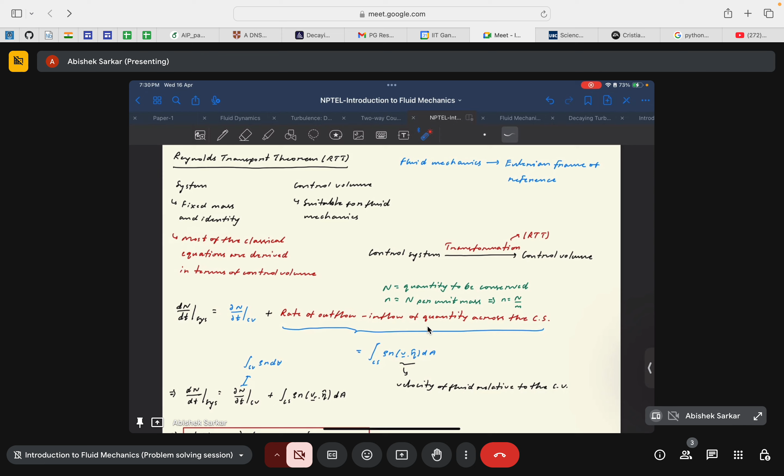Sir, are you going to put this PPT in the file. Yes, the thing is, I always update this PPT and send it to NPTEL, but I don't know where they upload it. So you can just mail them and say, give us the PPT shared by the TAs, so that it is helpful for us. It includes everything, so I think that will be helpful for you, right? Okay, sir, yeah.

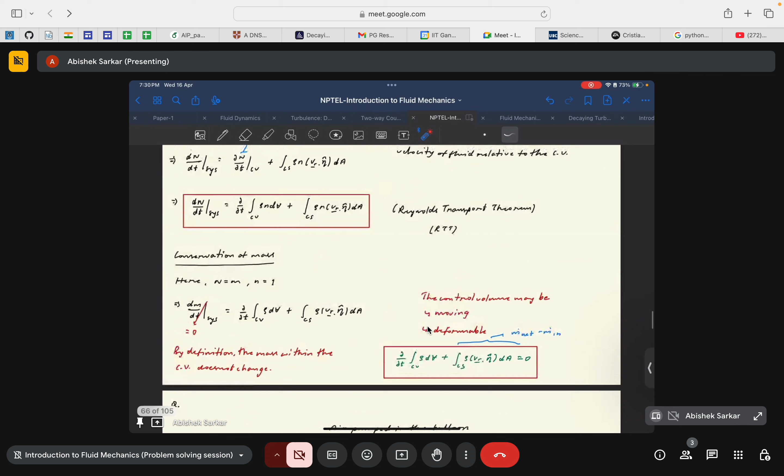Okay, then all sir, the best. One last question I want to ask. Are the questions statement based, numerical based, or fill in the blanks, or just as we have shown earlier in the assignment?

The thing is, questions may be theoretical, may be numerical, may be fill in the blanks. But it doesn't matter. Even if the question is numerical, you will have to solve it on your rough paper and then find the solution. So the questions will be quite similar to the ones asked in the assignment, that's for sure. That's why I suggested you look into the assignment problems after you look into the concepts discussed in class. That will be quite helpful.

Any reference books? Yes, the book by Professor S.K. Som, Professor Gautam Biswas, and Professor Chakrabarty: Introduction to Fluid Mechanics and Fluid Machines.

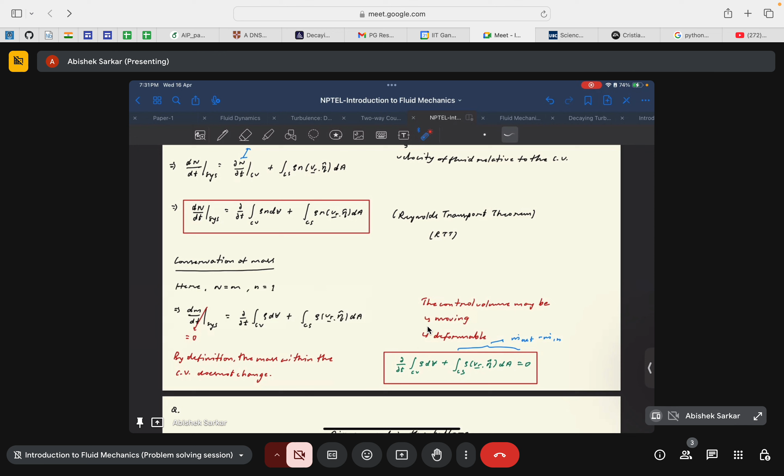Are you aware of that book? No sir, I'm not aware. You can find it on the internet, write down the name: Introduction to Fluid Mechanics and Fluid Machines, by Professor S.K. Som, Professor Gautam Biswas, and Professor Suman Chakrabarty. Som is the surname. Suman Chakrabarty is the tutor of this course. You can refer to that book, all the examples are given in that book, so it will be quite helpful.